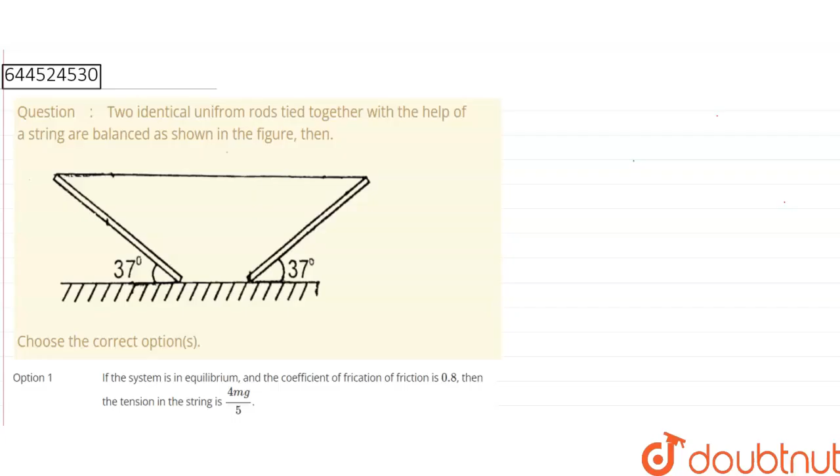Question. Two identical uniform rods tied together with the help of a string are balanced as shown in the figure. So in this figure, two uniform rods are given and they are identical rods. And there is a string. With the help of this string, these two uniform rods are balanced and also tied up. These two uniform rods are also at a 37-degree angle with the horizontal axis.

So now what we have to do is first find out the coefficient of friction at this contact, that means the coefficient of friction of the horizontal surface. And along with that we also have to find out the tension of the string, that is the tensional force.

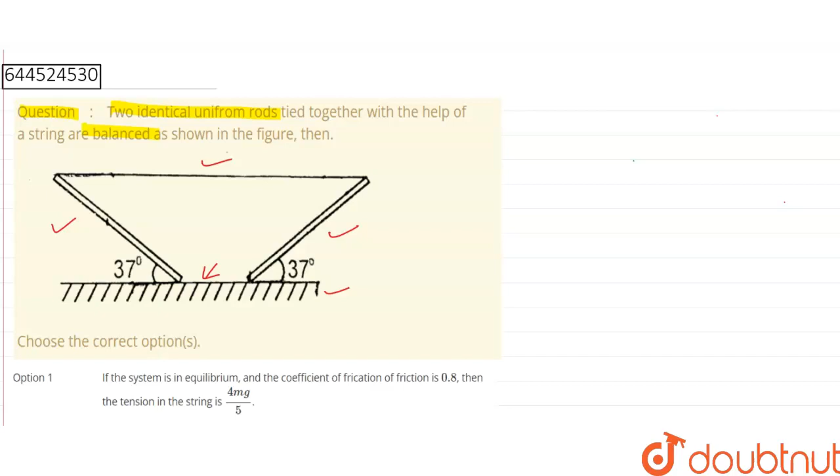There are four options given. In these options, we have to find out the coefficient of friction when the system is in equilibrium. If the system is in equilibrium, then what will be the coefficient of friction? And along with that, the tension of the string. So before that, first we will draw the diagram accordingly.

So we have drawn here a uniform rod of length L, which is inclined at an angle of 37 degrees with this horizontal surface. We have to find out the coefficient of friction at this contact. So L is the total length of this uniform rod.

Now we know that the center of mass of a uniform rod is at the midpoint always, because of symmetry. This half will be of length L by 2 and this half will be of length L by 2, and this will be the center of mass, the midpoint of this rod. So at position O, the total mass of this uniform rod is centralized. So we can consider the total mass is at O.

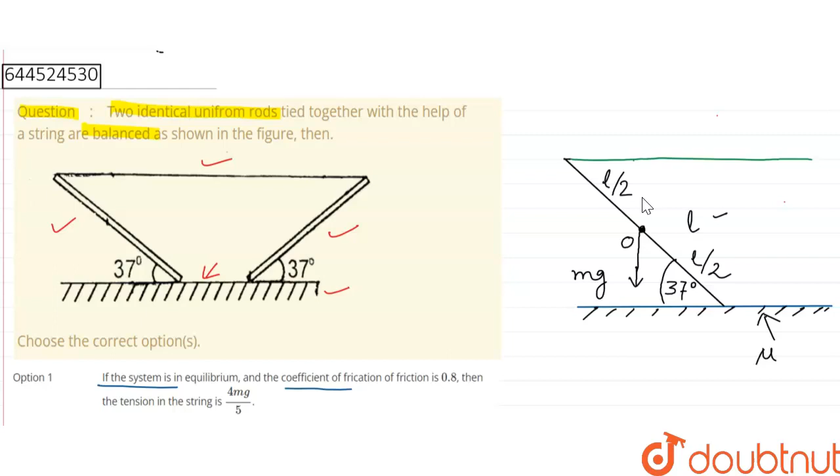So there will be a weight, and the direction of the weight is always vertically downward. So first we will draw this weight, mg, vertically downward. Next, this will be the direction of the tensional force, because the rod is attached with the help of a string, and there is the tensional force of the string.

So the tension will work along this side and the frictional force will work along this side. Frictional force always opposes the relative motion, so it will work in the opposite direction of the tensional force. And we also know that the frictional force is equal to mu into normal reaction force, from the definition of frictional force.

So what will be the direction of the normal force? The normal force will be directed vertically upward, exerted by this horizontal surface. So this will be the direction of the normal reaction force N. Now, what formula do we have to apply in this numerical particularly?

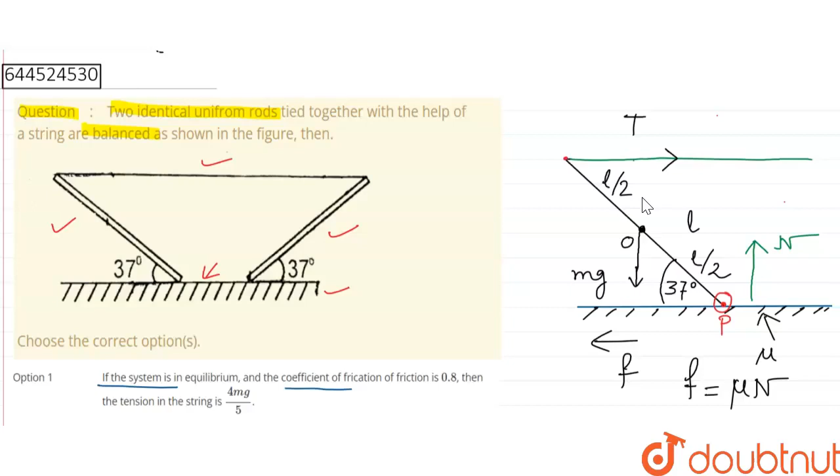We have to make the resultant torque zero about this point. Suppose this is point P, which is in contact with the horizontal surface. At this point we will find out the resultant torque acting on this uniform rod. There will be two torques: one due to the weight of the uniform rod and one due to the tensional force of the string. So about point P we are finding out the torque.

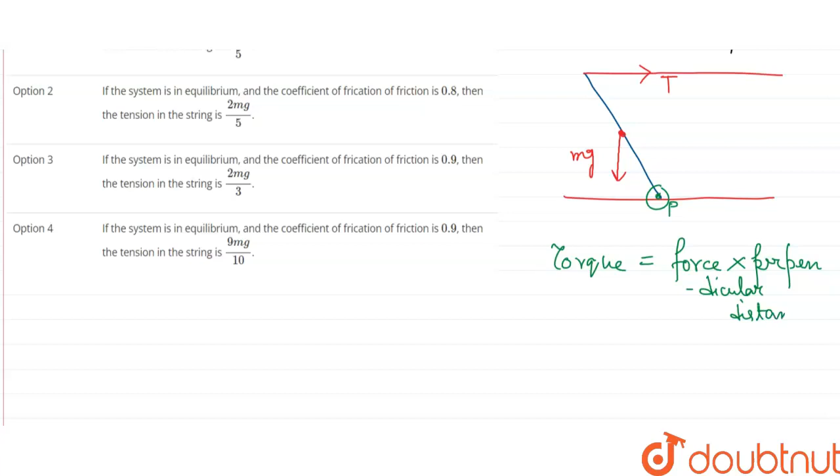So what is torque? Torque is equal to the force into the perpendicular distance. So the first torque will be due to this weight mg, which is directed vertically downward. So due to this force, what will be the perpendicular distance? We can see it clearly.

The perpendicular distance will be along this direction. If this is mg, the direction of mg is vertically downward, then the perpendicular distance will be along this direction. So what will be the perpendicular distance? This component of this length. Okay, this is symmetry, so L by 2, and this half will be L by 2.

Okay, this is angle of 37 degree, so this angle will also become 37 degree, interior alternate angle. Okay, this angle is also 37 degree, this angle is also 37 degree. So if this is 37 degree, then what will be the component of this length? It will be L by 2. Okay, because at this point we have to take only the half of the length at center of mass, so it will be L by 2 cos 37 degree.

Okay, so due to the force mg, weight, L by 2 cos 37 degree is the perpendicular distance, and another force is also present there, that is the tensional force. The direction of the tensional force is along horizontal axis, along this direction. So what will be its perpendicular distance? Its perpendicular distance will be vertically downward. This will be the perpendicular distance due to this tensional force.

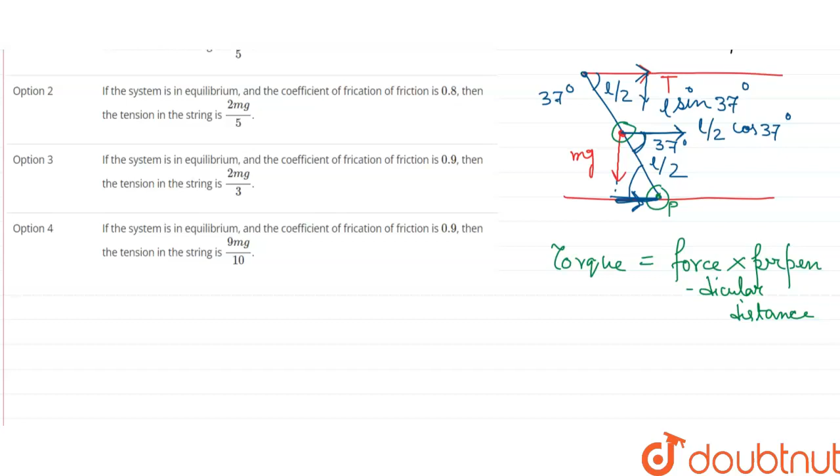Okay, understood? If this is the horizontal component, that is L by 2 cos 37 degree, then the vertical component will be L sine 37 degree. Clear? Because this is also 37 degree angle, which I have already shown in the first diagram. So if this is L by 2, then it will be L sine 37 component. Okay, then what will be the resultant torque? The resultant torque will be tensional force, and the perpendicular distance is L sine 37 degree.

Okay, then at equilibrium, it should be equal to the other torque, mg into L by 2 cos 37 degree. Okay, so now L will be cancelled out. So T into L sine 37 equal to mg into L by 2 cos 37. L and L will cancel out.

Then 2 into T by mg is equal to cos by sine, cot 37. Okay, and cot 37 value is 4 by 3. So again 2 and 4 will cut. So we will get T equal to 2 mg by 3. So this is the tensional force of the string. Now we will find out the coefficient of friction. Okay, so how to get the coefficient of friction?

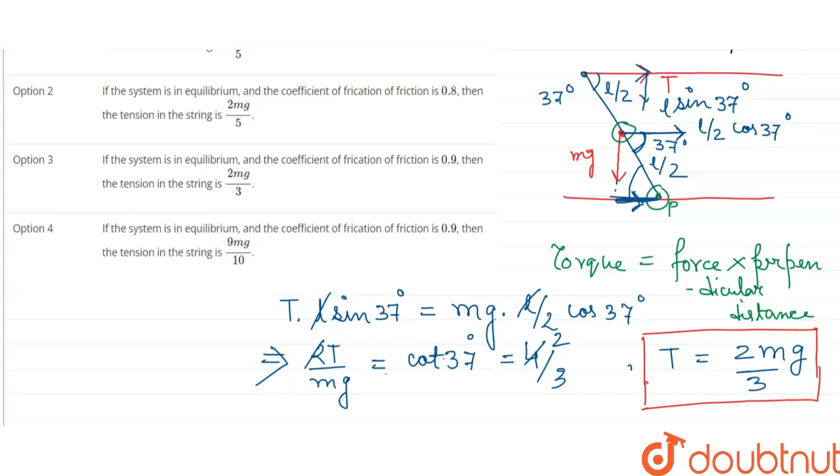As we know that frictional force is equal to mu N. Okay, where N is the normal reaction force and N will be balanced with the vertical component mg, because there is no other component, that's why N will be equal to mg. Clear? So mu is equal to the frictional force by mg. Now at equilibrium this frictional force must be equal to the tensional force, so T by mg,

because in the diagram it is clearly seen that there are no other forces that can balance the tensional force. Only the frictional force and tensional force are oppositely directed to each other, so they will balance. Okay, so T value is already 2 mg by 3, into 1 by mg. So mg cancels out. Okay, it will be approx 0.66. Okay, so the value of mu is 0.66.

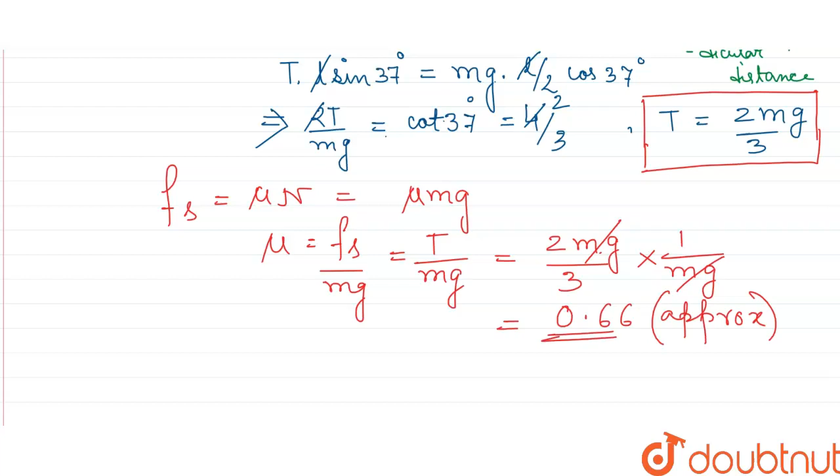Now we will verify all the options. So in the first option it is written coefficient of friction 0.8, tension is 4 mg by 5. Now we have to keep in mind that maybe the coefficient of friction can increase, but the tension of the string will remain same, will remain fixed. So this option is not correct. Again in option 2 the tension is given 2 mg by 5. This is also not correct.

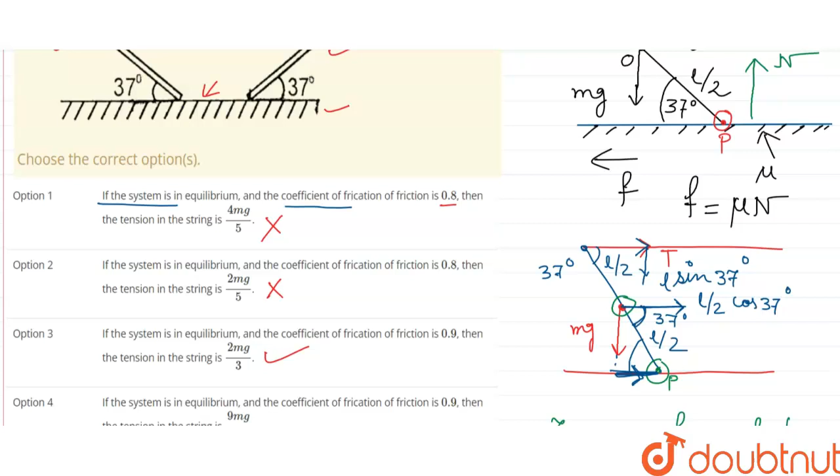Option 3 is 2 mg by 3. So 2 mg by 3 will only be the tensional force and coefficient of friction will be 0.9. It can be greater than 0.6. Okay, and option 4 is also not correct because in option 4 it is written 9 mg by 10. So this is not correct.